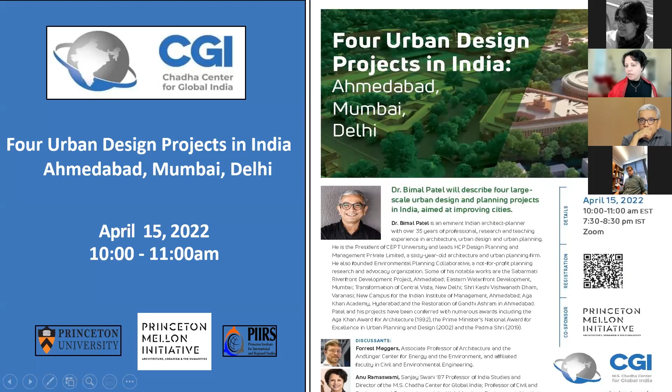Meanwhile, I'll introduce today's seminar and speaker. So I'm Anu Ramaswami. I'm the faculty director of the Chadha Center for Global India. My own background is in interdisciplinary sustainable urban systems. And so I'm particularly delighted to welcome today Dr. Bimal Patel, who's an eminent architect, and he's going to share with us 4 very exciting urban design projects in India. Let me give you a little bit of background about our center, and then I'll talk about today's program, our speaker, and our discussants.

The Chadha Center is a relatively new center at Princeton University. We began in 2019. I joined here as the inaugural director, and we've been really thinking about how can we be interdisciplinary in our study of India and look at the interactions between India and the world that shape human and planetary well-being and our imaginaries of the human experience. And so I'm particularly glad with the interdisciplinary focus to be co-hosting this event with the Princeton Mellon Initiative. And together we'll have an engaging conversation with Dr. Patel about urban design in India with focus on architecture.

So let me quickly speak a little bit about India. I think we all know this, but we anticipate 400 to 500 million more people to be joining urban India by 2050. And the sorts of changes that we're seeing in terms of sustainability, well-being, efficiency, economic development are all going to be tied up to India's urbanization story. And so that's why this topic is so relevant in terms of thinking about global India and how India is going to be in 2050.

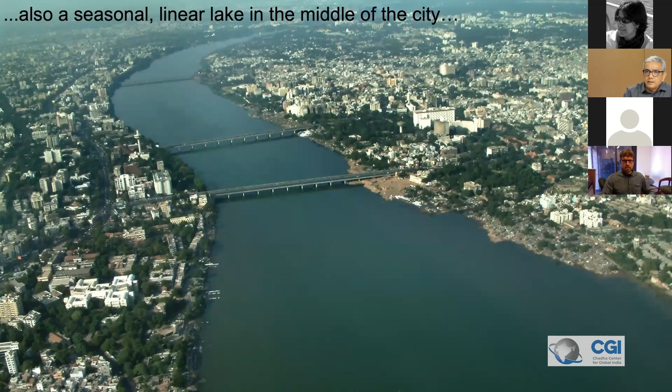Also, a barrage built downstream in 1976, which is a long time ago, had turned the river in the middle of the city into a sort of a linear lake, a seasonal linear lake. And the water would be used up for irrigation, and then it would turn into a dry riverbed. This is not a perennial river. This is a monsoon-fed river. But after monsoon, we had a lake, and then not.

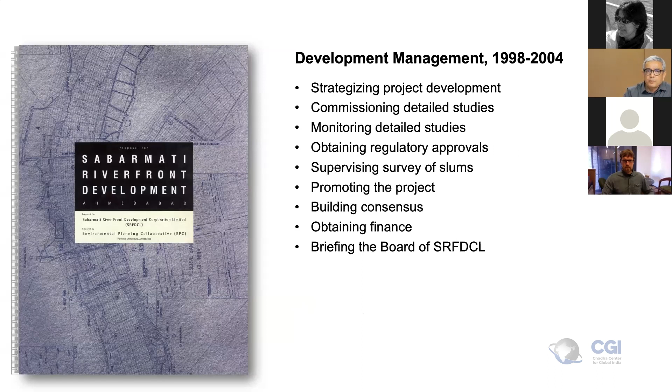We started with a comprehensive master plan in 97. We looked at everything from physical features of the river to hydraulics to financing, etc., and produced a report. After that, I was involved for 6 years managing the project and bringing it up to a point at which it could be implemented. So I was a manager to the project, and my team, we were managing it for a while.

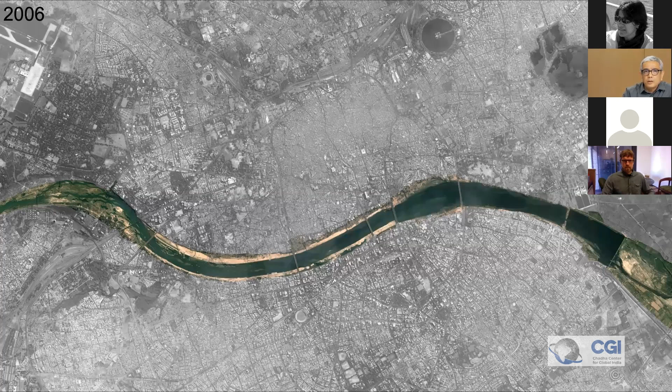So here's the river, as you can see, 11 kilometers of it in the middle of the city. This is in year 2001. The project hadn't started at that time. 2002, we had riots in Ahmedabad. This was also a bad year for Ahmedabad. Project hadn't started. Then in 2004, it commenced. And here you can see in 2006, the reclamation works already there. 2007, 9, 15, and presently.

Projects like this are ongoing projects. It's not totally complete as yet, but a lot of the important works are all finished. So that's what the river looks like now, and that's an aerial view of the river, and the riverfront on either side you can see. The project has 11 objectives. The very first one of them was to make the riverfront accessible to everyone.

Now, as you can see here, earlier, the river was hemmed in by development on both sides, and it was impossible for people to walk along its edges. So the only place they could experience the river from was the bridges. And whichever points there were to get down to the riverbed were all choked up by informal housing. So the basic work here was to train the river, build embankments, and reclaim land, slivers of land on either side as a sort of a public realm.

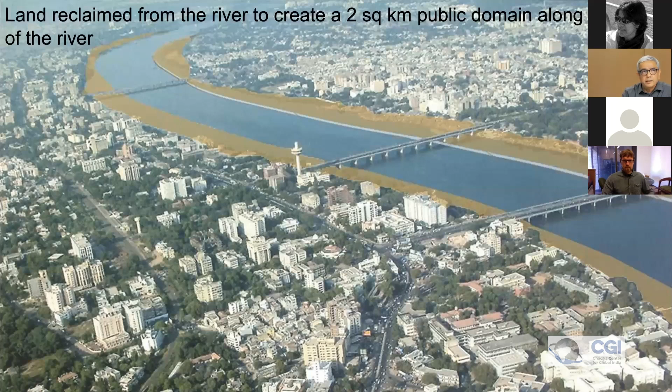So we reclaimed 2 square kilometers of land in the middle of the city and 11 kilometers of the river. So here's just an image of the reclamation works underway. And eventually what the project has ended up doing is it has socialized a private riverfront and made it accessible to everyone. And the land is still being developed even now. So what used to be a riverbed like this with buildings coming right up to the edge now looks like this, and you have a public realm all along, parks, gardens, streets, various things.

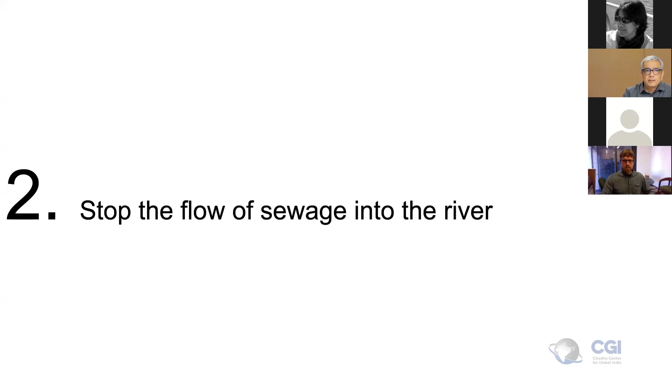The second objective was to stop the flow of sewage into the river. And we had big untreated sewage drains like this flowing directly into the river. This is like rivers across the world and certainly in India where you have sewage coming in. And here what we essentially did was to build interceptor sewers, tap the sewage that was coming into the river, and take it to the 2 sewage treatment plants that you can see downstream here.

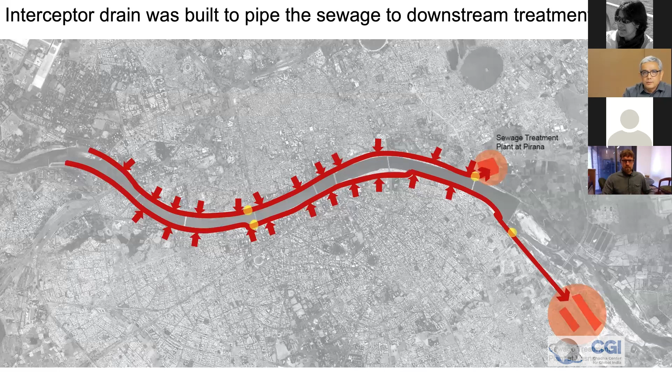So this is the works underway. The interceptor line was built into the reclamation. And now the flow of sewage into the river has been almost completely stopped. Few works are pending, and so the water now is relatively clean. It's not sewage.

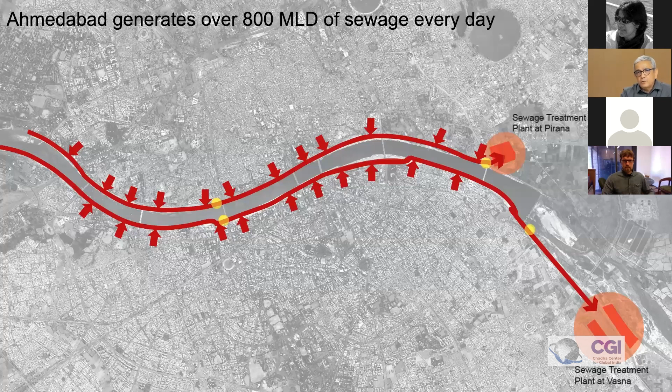The third objective was to replenish the river and recharge groundwater. So the river is a sandy bed, and it loses 7 mld of water every day. This is good news for groundwater recharge, but you need to keep adding water. And so the idea, which is not complete as yet, but underway, is to use treated water from the sewage treatment plants and put it back into the river so that Ahmedabad can have a sort of a perennial lake, a linear lake in the middle of the city. And this work is underway, and presently the water in the lake comes from the Narmada, and it will come from treated sewage very soon because the other water is not available.

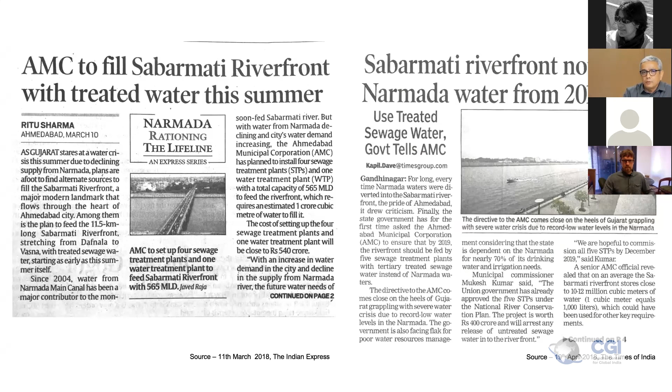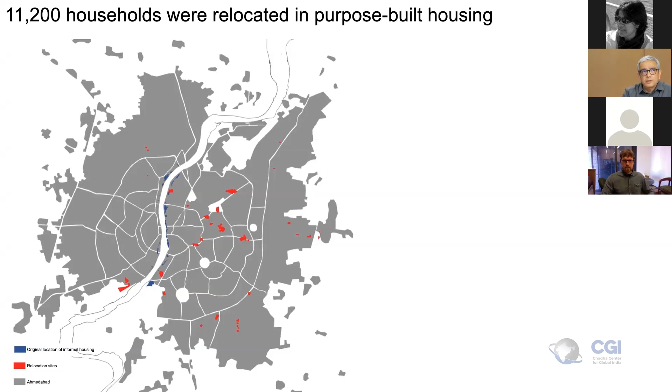Essentially what was done was to relocate the people from the informal housing on the banks of the river to these resettlement sites, colored red here. They are in the middle of the city. It meant a bit of disruption, but eventually 11,200 households were relocated in purpose-built housing.

Now, actually, 1,100 crore rupees, I don't know if that means approximately, I think $150 million were transferred to 11,000 of Ahmedabad's poorest households. So this was a very large component of the project, which is to actually bring subsidized housing to the poorest people in Ahmedabad. The fifth job was to reduce the risk of erosion and flooding.

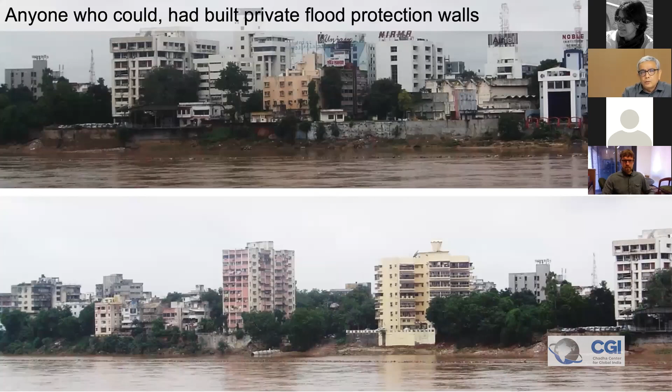Now the river in monsoon gets a lot of water, torrential floods of this sort. The catchment areas are controlled by dams, but even then, when the dams are open, you get a lot of water. So everybody who could had earlier on built their own private walls. Anybody who could afford it had built private walls. Now what the project has done is to give a common wall to everybody.

You can see here in 2015, the flood water here and the lower promenade where the trees are is submerged. And then when the water goes away, this is the situation after the flood. So the whole city has been protected from floods by this embankment, an 11-kilometer embankment.

Sixth job was to create riverfront promenades and parks. So here you can see people enjoying the water. In 2012, at the lower level, we have a pedestrian promenade of this sort. The section of the river is pretty much like that in Paris, for example, but we don't have streets at the lower level. It's entirely pedestrian here.

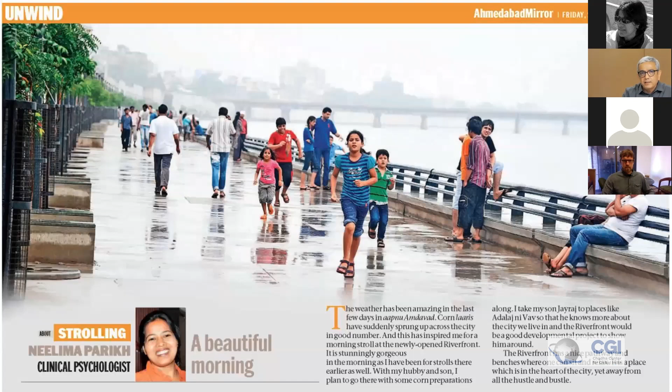And the trees have grown since then, and this is a clipping from the newspapers at that time. It brings lots of people to this place, people of all ages, all classes, etc. meet. So this has given a vast amount of public space to the city.

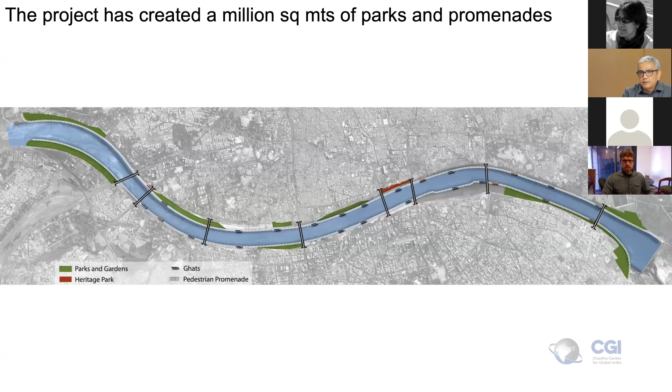Many parks have been built, like this one that you can see. This is a large 1.5 kilometer long park across from Gandhi Ashram. There are other parks like this one for children, or this one which has got a flower garden, etc. So the project has added almost 1 million square meters of parks in the middle of the city, in a city that lacks public space and parks.

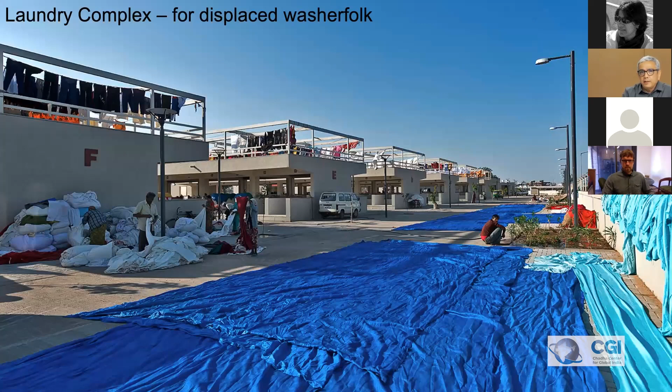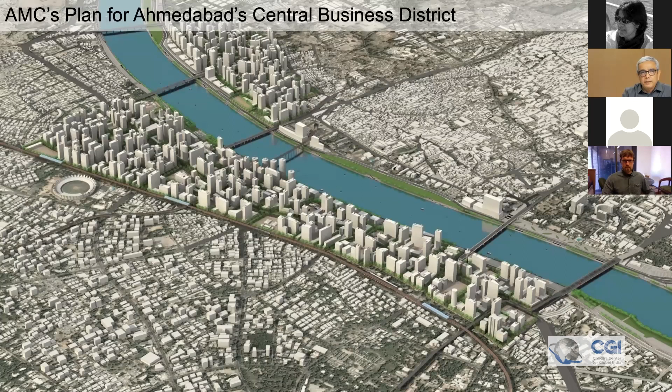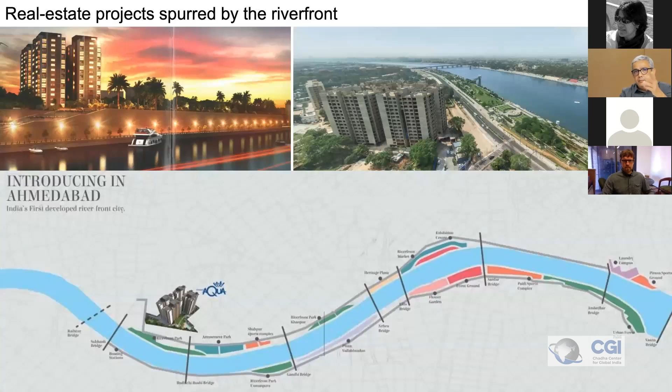And eventually buildings like this will come up, maybe here. The areas on the side will be densified, and indeed many developers have already started building on both sides of the project.

That's the north-south link, as you can see here. Here's another view of the same thing.

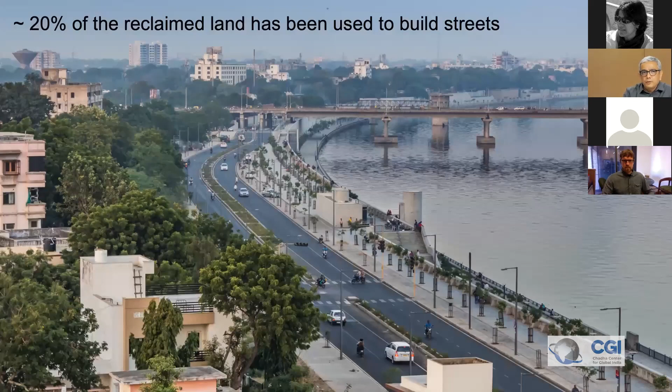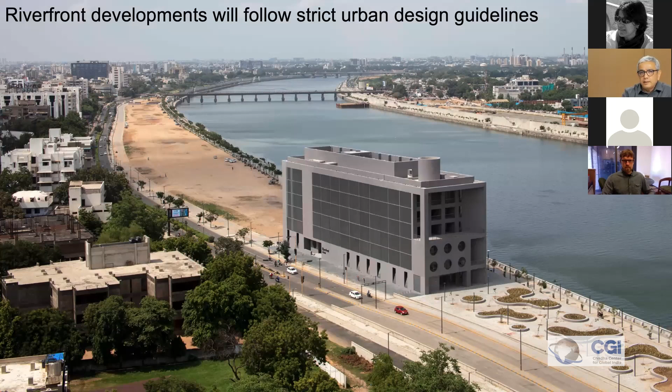The 10th idea was to pay for the project. It's a completely self-financing project. It does not use tax money, it uses borrowings just now. But all this land colored in blue, about 14.5% of the total reclaimed land, is to be sold for development. The first building that has come up is this one here, and 14.5% of the land will be used for buildings like this. You can see that it has no compound wall, which is what most Indian buildings have, so the edge is clear.

The cost of construction for this entire project was about $196 million US. The cost of relocation housing was 144 million. Interest and other costs is 98. And revenues expected from this project, from the sale of land, is 459. The prices of land continue to rise, so the project is financially very, very safe in a sense.

The 11th objective was to bring Ahmedabad together around a large civic project, and here build its capacity to tackle complex urban problems. So here's me when I had black hair in '96, explaining the project to stakeholders. A lot of work initially was about getting everybody involved in the project.

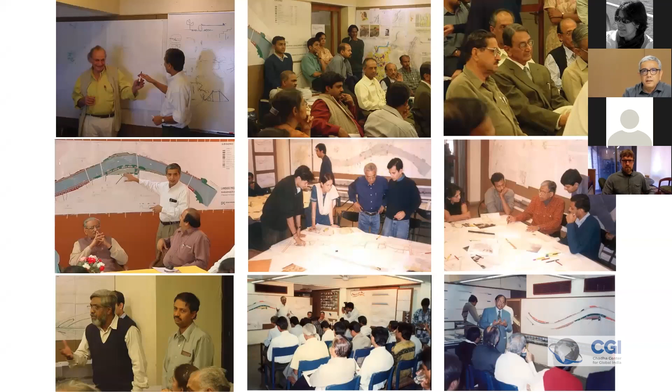In the city, here's a workshop for the professionals of the city. Here's an exhibition, there were many such. I'm just showing you a few pictures. Lots of people thronging by the model for the project. And the newspapers get involved in this.

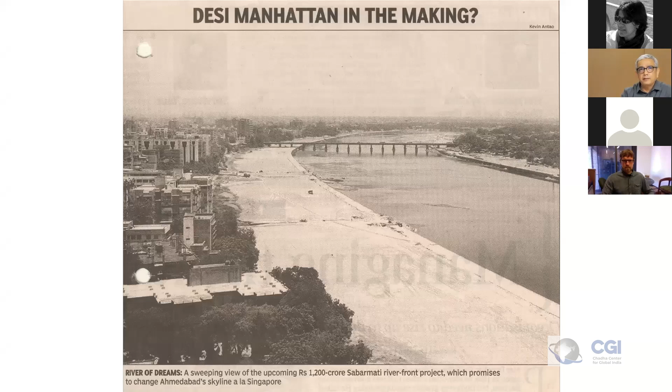There was lively, contentious discussion about the project. Here's something about a Desi Manhattan in the making. And here's, of course, people who were worried about the project, had apprehensions, and were genuinely concerned about many aspects. Here's somebody who claimed the historic market is going to get wiped out. And here's somebody who's worried that this is going to be entirely commercialized. So the newspapers became a place where a lot of these debates were held.

And the High Court got involved. So it was a project that went through all the contentions that you might expect in a democratic society.

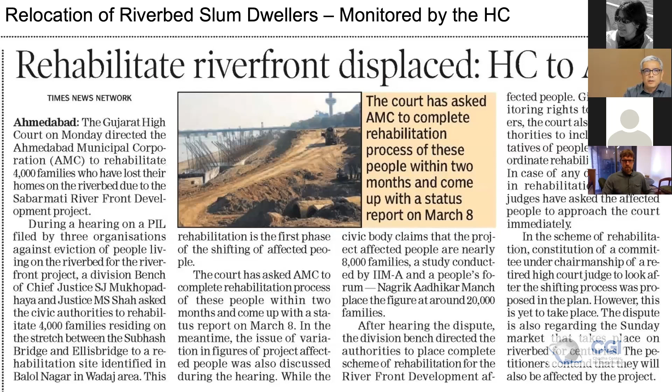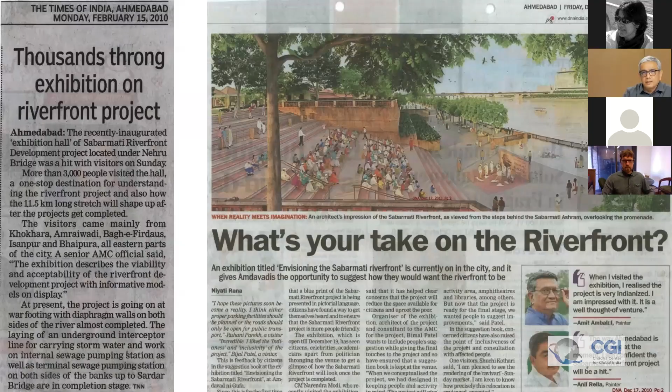So really, this project is about bringing the river back to the city and the city citizens back to the river, and that's what it's about. So I'll stop on this project at this point. Let me go to the next one.

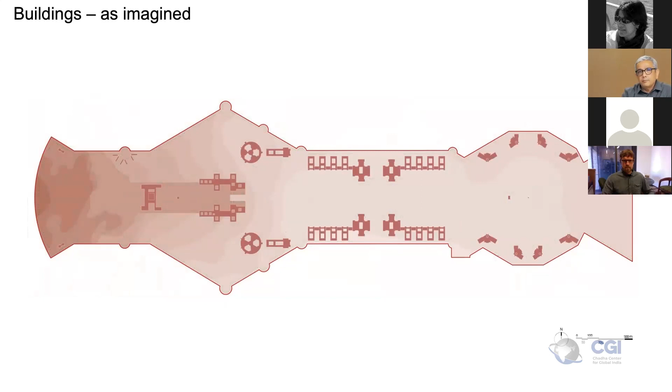There was this gently sloping terrain on which a platform was created, on which a grid of streets, orthogonal and radial streets were put, a lovely landscape, and then you have formal gardens on either side. This was inspired by Paris, the Champs-Élysées, and the Washington Mall, and then there were these avenues of trees here. This was the vision of Lutyens, that there would be buildings on either side of the central processional route. But eventually he was able to build only this much. So by the time the Raj ended, only this much was built.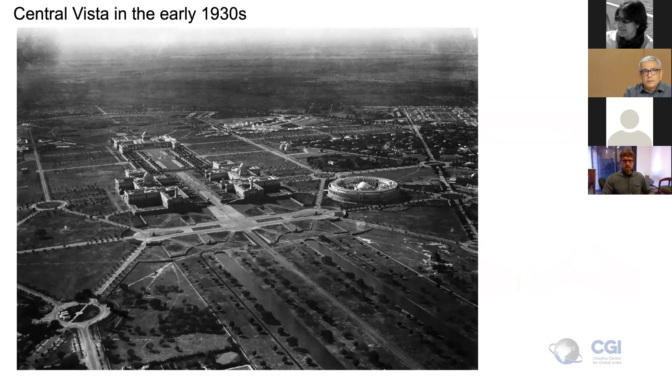Here's an aerial image of what the place looked like. When India became independent, the whole place was appropriated by Indians. This is in 1947. The people took over the place. The government house, or the Viceroy's palace, became the Rashtrapati Bhavan, the President of India's house.

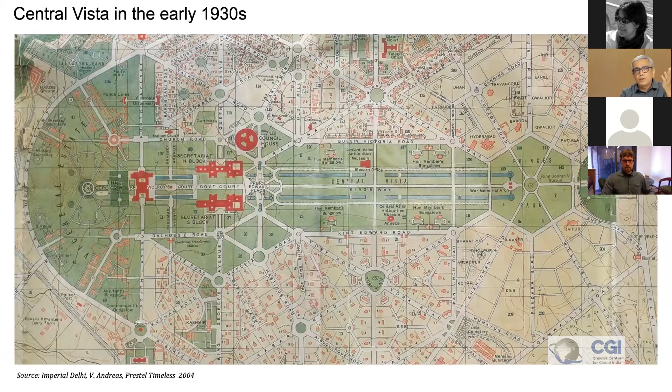The council house became India's parliament, and the government offices became ministry offices. So this is the icon of the government of India. But over the years, this place has been managed without a comprehensive, inspiring vision, and very poorly managed, actually. So what used to be something like this now looks like this. You can see this sort of haphazard set of buildings that have been built on either side of this very, very formal landscape and street network.

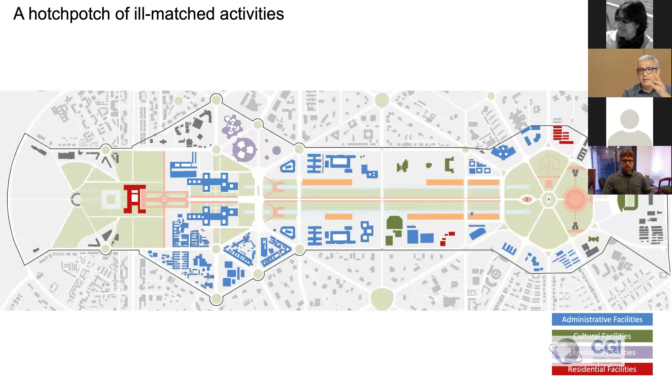Now, it's a magnificent space even now. It's the seat of India's government, a heritage asset, a precious civic space. It's the most visited tourist destination, but it's a hotchpotch of different administrative, cultural, legislative activities, many of which don't need to be here. All of government's ministries cannot be housed here because there's a lack of office space. There are old World War II barracks, these red ones here, you can see, that were never removed, and precious land is occupied by these barracks and jobs that don't need to be here. This is what the barracks look like next to magnificent heritage buildings.

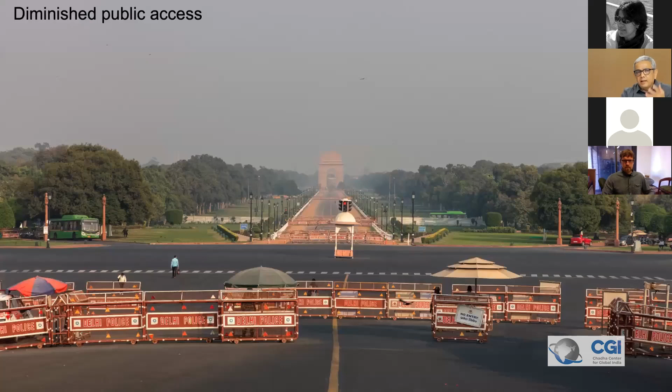The public access is diminished because of VIP movement. It's a very poor use of land. The government buildings have a sea of parking around them, and not a single additional square foot can be built.

Inside, the offices are quite dispiriting. 50,000 people work here, but it's really in poor shape.

There's inadequate office infrastructure. These buildings were not meant to be air conditioned, so they rely on window air conditioners, which guzzle a lot of energy.

The architecture is quite incoherent everywhere. It's just separate sets of buildings plotted out and built upon.

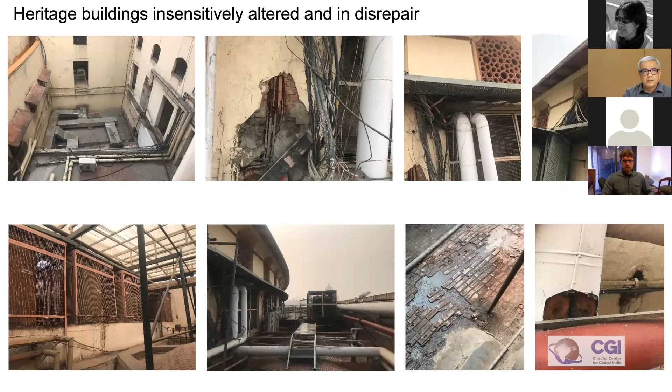All the old buildings are in terrible shape. All of Lutyens' buildings have been added to and altered, and the infrastructure put in there has been destroying the buildings over the last few decades.

The landscape is quite lackluster. For much of the year, these are just large lawns on either side.

The streets are poorly managed, with poorly managed traffic and parking. There's a big national parade every year, but there isn't adequate infrastructure for it.

This is the most visited tourist spot in Delhi, but the facilities are inadequate. There aren't even toilets. There's no place for anything. So this place has been crying out for improvement for years.

The Central Vista project basically aims to comprehensively transform this space to ensure that it serves its many different functions effectively.

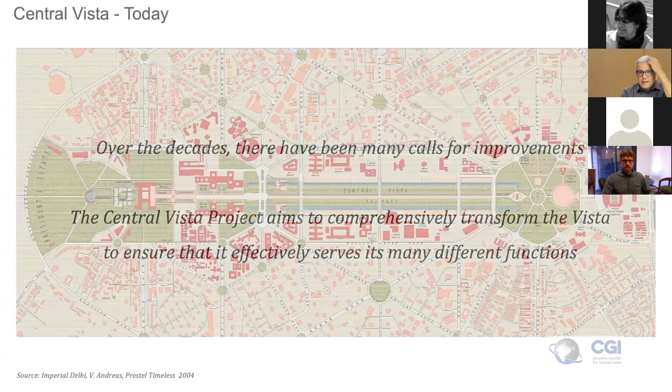It's a large project, and I've done talks on it which are available on YouTube.

This is what Central Vista looks like today, and the master plan will turn it into something like this. Let me go back once - that's what it is, and that's what it will look like. There are a number of facilities to be built on either side, along with parks and gardens.

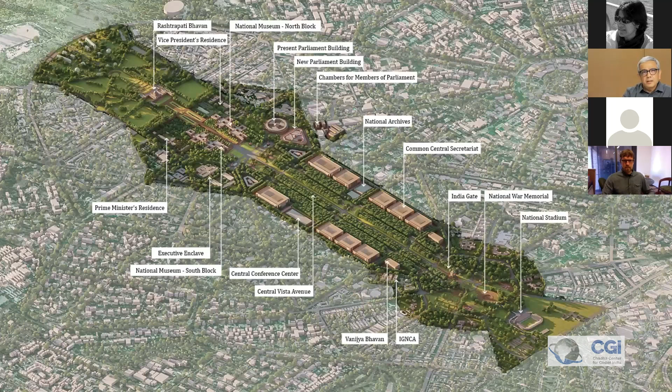The first objective is to modernize and expand Parliament's facilities. Next to that round building, which is the Parliament, we are building a new triangular-shaped building, the new Parliament building. The old round building is quite inadequate for Parliament's needs.

This triangular building is the new one being built right next to it, and the two will work together. The old building will be restored and its offices will be used; it will also have public places for people to visit. So that's what the Parliament complex will look like.

The second objective is improving productivity and efficiency of administration. This is to be done through these donut-shaped office buildings you can see - there are 9 large buildings and 2 small ones on the far right, along with the National Archives and a conference center.

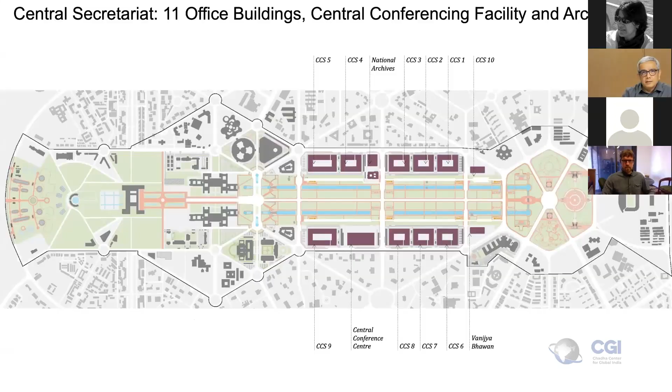Just to give a quick idea, these are the large office buildings on the two sides. The buildings are large, each one housing about 6,000 people working in them.

There's a courtyard in the middle, and it's a very rational, efficient office building connected by an underground people mover linked to the metro - so it's a transit-oriented development, completely and seamlessly connected with public transport.

The first 3 of these buildings are being built right now. Here are some images of what the buildings look like.

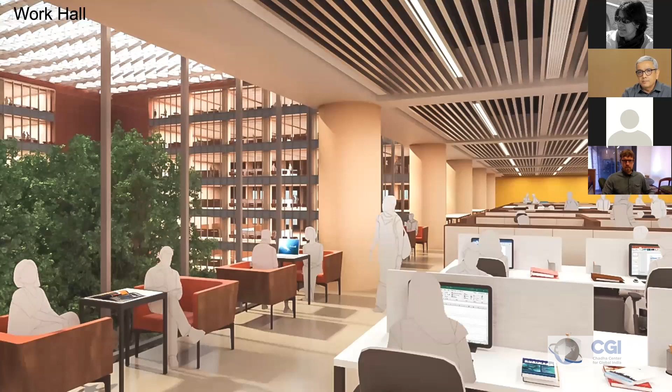That's the entrance, and these are the workspaces inside - straightforward, large work halls overlooking the courtyard in the middle, with lots of natural light, proper air conditioning, and very efficient energy use.

These are the offices inside - large ministers' offices, though not every office is that large.

In the center there's a big courtyard with places for the staff to work and have lunch. So that's the courtyard in the middle of the building.

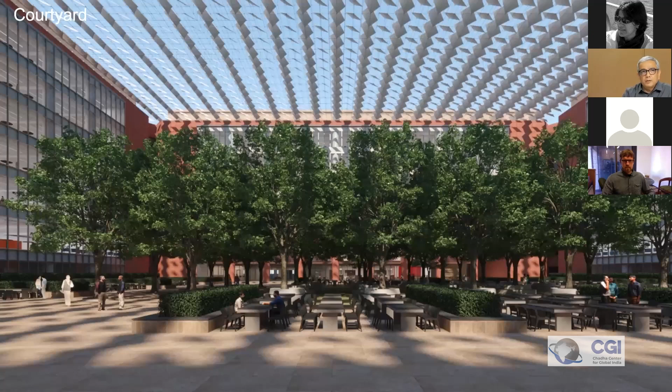So there are basic office buildings on both sides, and the National Archives of India is here as well.

On the left-hand bottom corner, you can see the old historic block with the three courtyards, designed by Lutyens. It's a lovely building. On the right-hand side is a large block we are building - you can see the historic building on the left and the large new archive block with all sorts of modern facilities on the right. This is to replace a present annex, which is in very poor condition today.

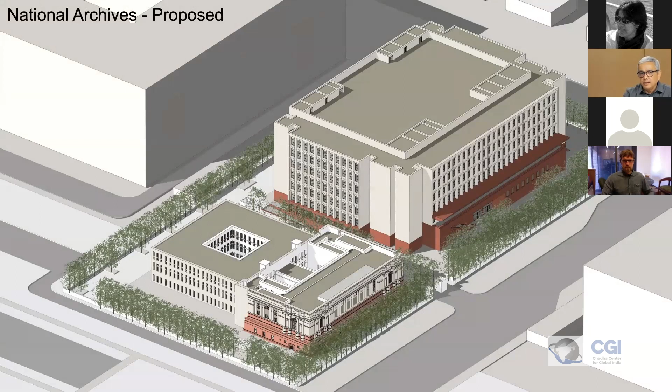I'm not going to talk about the conference center - it's not designed as yet. It's all a sequential thing. We have to build a few buildings, move people there, and then tear down older buildings and build new ones. That's the idea.

Now, the third objective is strengthening cultural and recreational facilities. There are museums, there's IGNCA here, but let me just talk of this central space in the middle, which is a large and vast public space for national events. It's a precious civic space for Delhi's residents.

You can see here people use it in a marvelous way, and tourists throng to it, as I told you earlier. But it's under much stress and in a state of disrepair. So we're basically keeping its structure the same.

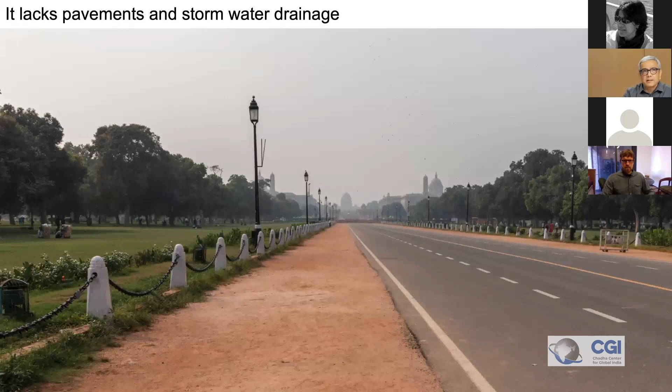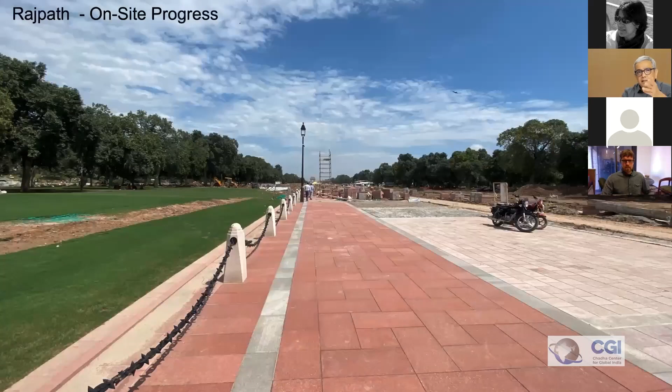That's the pathway under construction. Most of it is finished. We added a lot of infrastructure below the pavement so that national events can happen in a better fashion.

This time's Republic Day parade actually took place here, and everything functioned quite well, as you can see here. The landscape is lackluster, and we want to add proper irrigation systems, because otherwise we were wasting too much water growing these lawns.

So there are these lawns here that have been done, and the place is going to be thrown open to the public in another month or a month and a half.

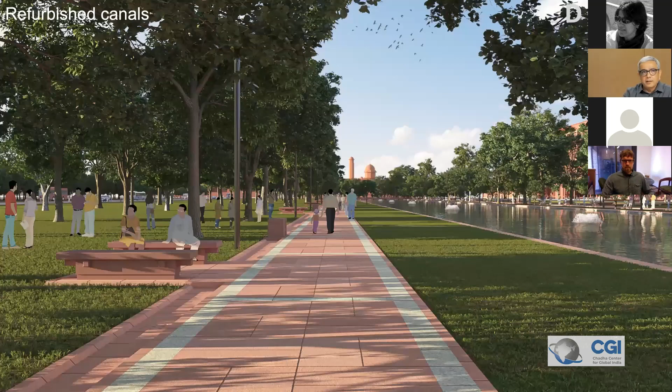Places like this had no pavements and walkways, and there were bald patches in the lawn. We said we would improve the canal on the right-hand side, and you would have these sort of walkways with benches and trees. Here is the same place that has been transformed with this landscape.

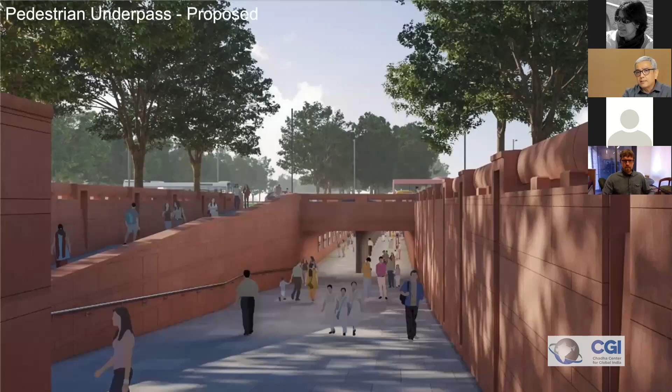There are places for vendors, where the informal sector can come and sell. There's toilets, amenity blocks, etc. Pedestrians have a rough time crossing streets, so we have underground passages that improve pedestrian connectivity - a basic uplift and refurbishment of this place.

Also for the parade, they had no real infrastructure, so we're making this easier for them to hold the parade without destroying the landscape. Instead of the sort of seating that used to be built every year - build and break, which Indians are quite familiar with - we now have bleachers of this sort, and this time's parade used these bleachers.

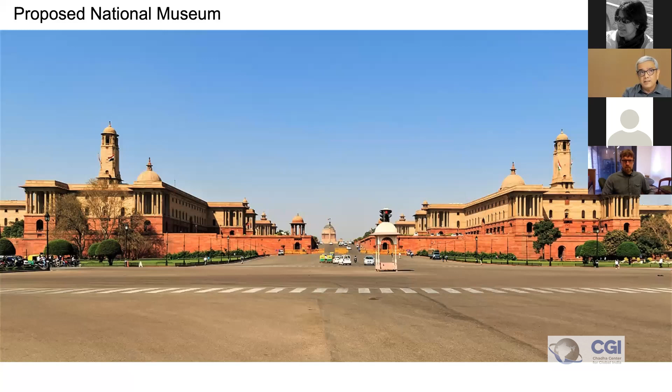The National Museum - this is actually the seat of the government right now, and powerful ministries sit there, and that will be converted to a museum.

Now, the ultimate objective - I'm not going to talk about points 4 and 5, their work is underway - is protecting heritage, expanding public space, and changing the iconography of power here. So you can see here, this involves a few things.

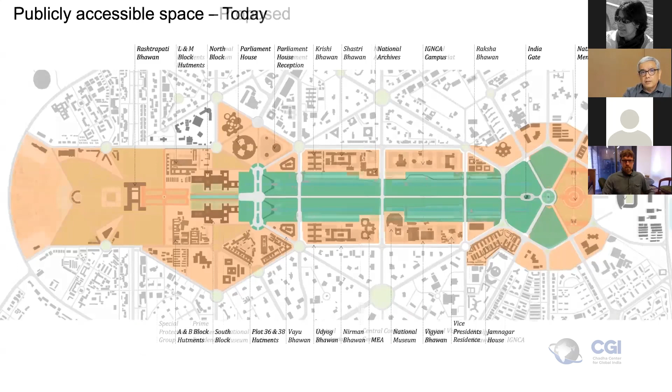The green space here in the middle is what was publicly accessible space earlier. After the project is complete, the green space expands. So we're actually expanding public space when we develop the gardens here.

These bastions of government are going to be turned into great museums, national museums, because the ministry offices inside the building will be moved to the new office buildings that are coming up.

As you can see, the whole project is an upgrading and a transformation of the space without altering its basic structure. So it's heritage protection, it's an improvement of the environment.

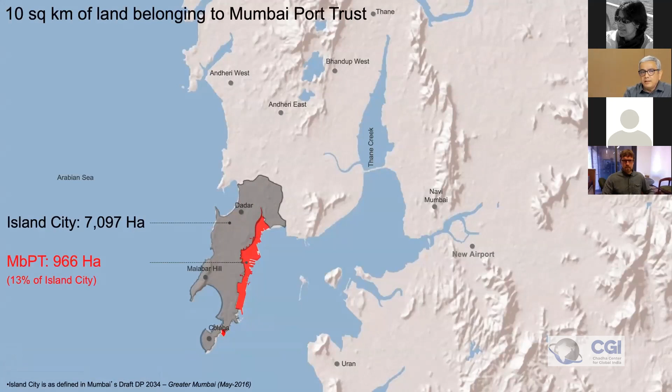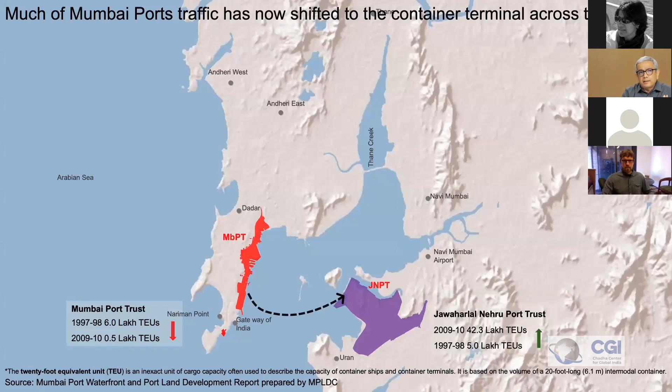Through the 19th and 20th centuries, this was the engine for Mumbai's economic growth. Then, like most port cities, the port got choked by the growth of the city, and so it moved across the bay. There's a big container terminal called the Jawaharlal Nehru Port Trust, and so this entire red piece of land is now underutilized. Some port activities continue here, but most of it is derelict structures, vast open spaces that can be put to better use.

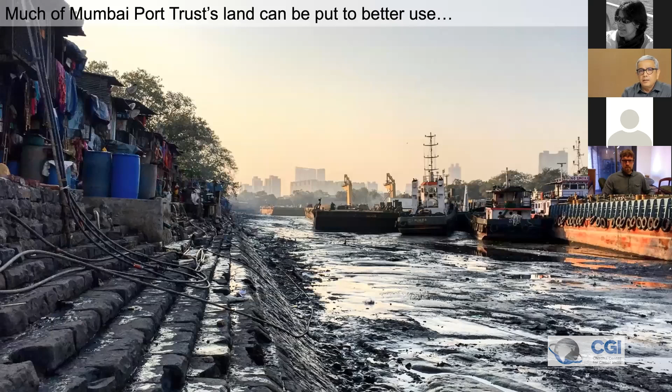There are many buildings getting encroached upon, with lots of informal housing here, and immense pollution from whatever shipping remains. There are vast pieces of land that could be put to better use. And of course, it has a magnificent 11 to 12 kilometers of sea area that Mumbai people simply cannot access because it's part of the port. So this can be converted.

Now, the other important thing about this piece of land is that after all these transport proposals, many of which are underway, like the Trans-Harbour Sea Link, the metro line, or the railway line, when all of these get done, this is going to become one of the most well-connected places in the city. So you have 10 square kilometers of land in the middle of the city, and it's the best connected in a city which is dense and crying out for more space.

So here's a great opportunity to monetize a portion of this land. The land belongs to the central government, and the shipping ministry manages it. Of course, it has to be done in a way that strengthens Mumbai—there's no question about that. So that was the real objective of the project. And we also saw in it an opportunity to demonstrate a new paradigm for urban planning for Indian cities.

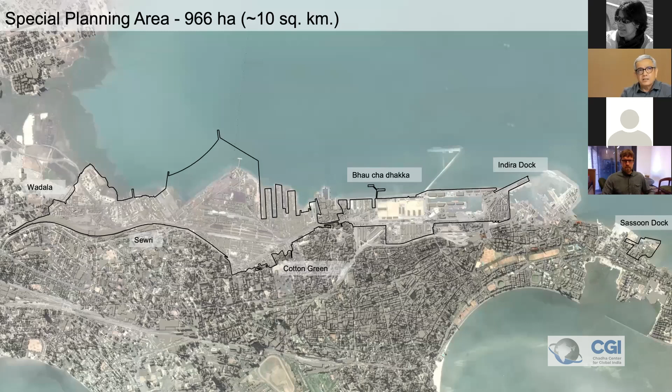So we did a large master plan to start with. You have 10 square kilometers, and this is what our master plan looked like. That's not important, but here you are—here's a model of how we propose the land might be used, and here's another model of the same thing.

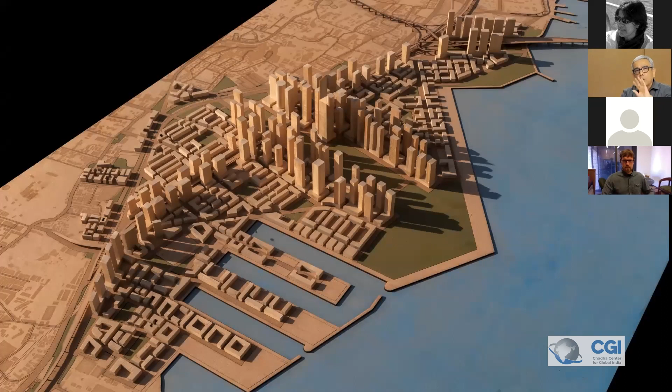That's the redevelopment site number 1, which is about 2.5 square kilometers. Some of it is still going to be used as a port, so not all of the 10 square kilometers will be developed. This is the most intensely developed 2.5 square kilometers.

Now, there are many features of the plan I can talk about—I've given talks about this which are also available on YouTube. But let me talk about just one aspect of this plan: the sensible use of land. I think there are many special features about this plan that demonstrate how we might do urbanization differently in India, but let's just look at one—the sensible use of land.

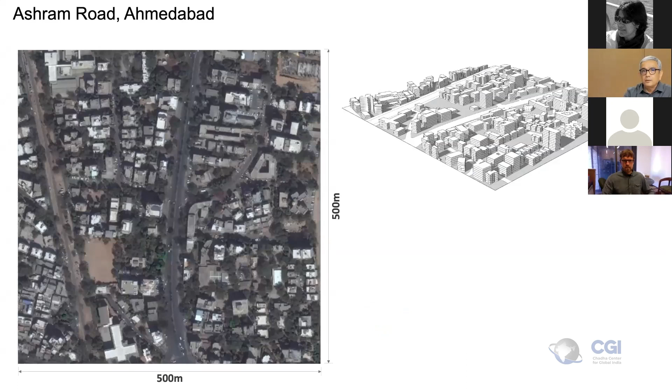If I studied one of them, which is in the center of the city, this is how we use land. The 500 by 500 meters is what you see in the satellite image on the left, and you see how a typical Indian city looks on the right. If you look at the public realm, which is streets and parks, only 17.2%, the gray colored area, is in streets and parks.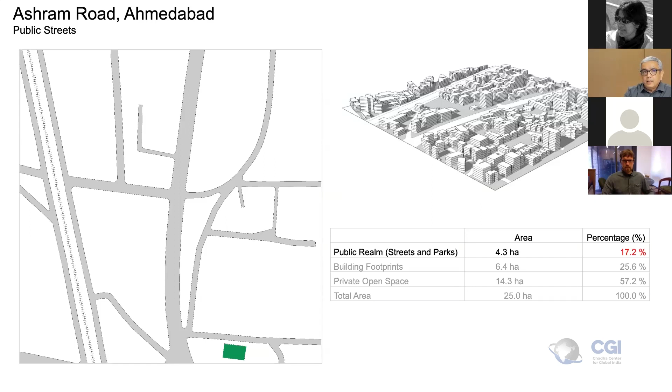So there's very little land in the public domain. If you look at building footprints, which is also very important for a city, only 25.6% of the land is under building footprints. So what's happening to the rest, the 57.2%? That land is privately held land that private owners cannot statutorily use because of building regulations, so most of this land is very poorly utilized.

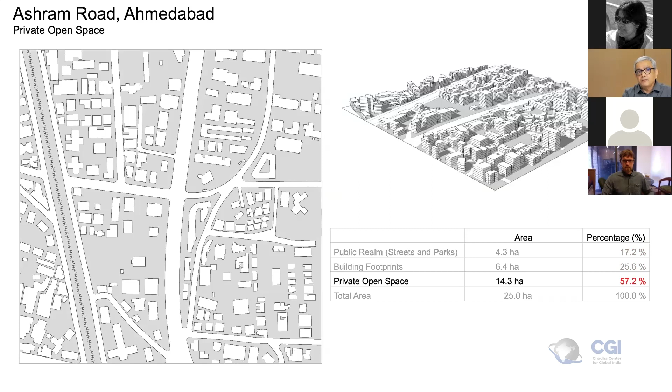Just to show you what these places between buildings look like—it's all these colored slivers of land that you see here, little slivers like this. Anybody who's been to an Indian city understands what I'm saying. There are buildings sitting in private plots with land all around, and all of that land adds up to 57% in this case. It's underutilized like this.

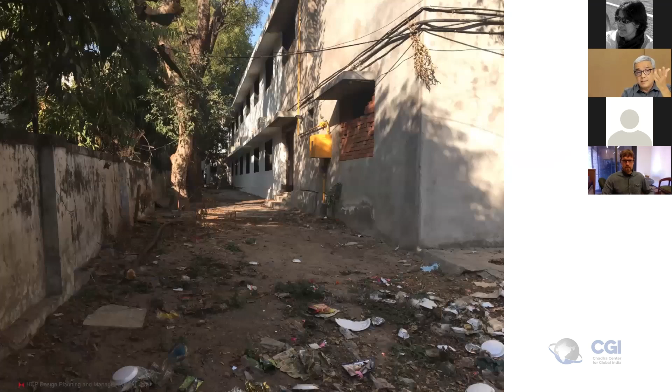You grow a few trees, but really it's very, very poor use of center city land. So these private open spaces are mandated by unthoughtful building regulations—they are mostly small and ill-shaped.

They cannot be well used by private owners. They do not confer much public benefit. And I'd say it's very easy to conclude, or I think most people will conclude, that the allocation of land in Indian cities is very, very wasteful, which is why they seem congested, yet they do not have enough space for people. If you take Mumbai, this is the same story.

This is the most precious land, the Nariman Point in Mumbai. And if you look at the piece of land here, this is where the wealthiest people of Mumbai have their offices. And you have 53.6% land just wasted in space around buildings in private plots.

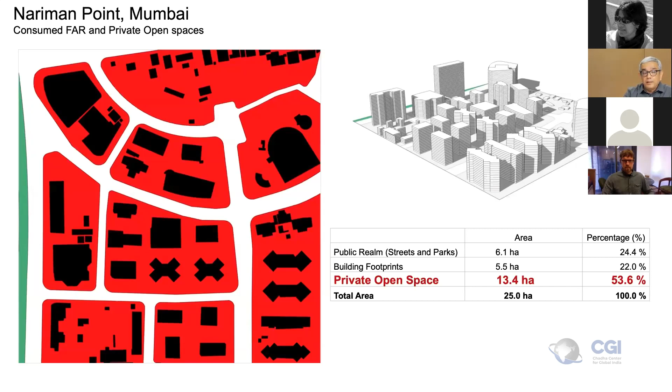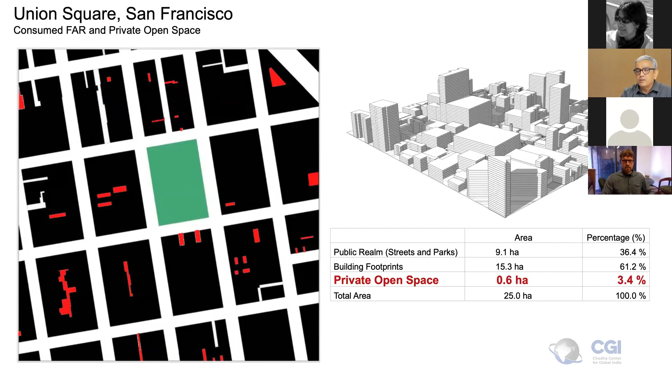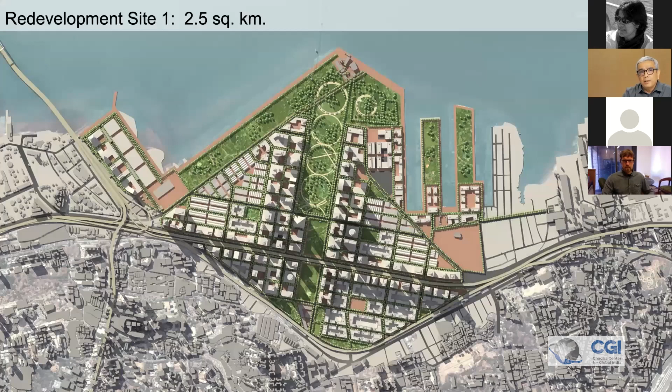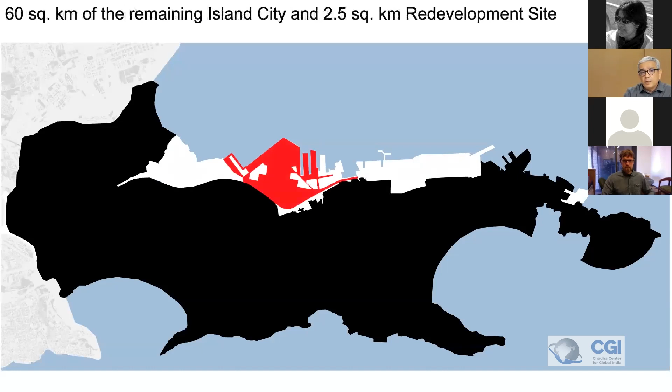Now, the plan for Mumbai Port shows how Indian cities can make much better use of land, and that's what we have done. Now, to explain what this is, let me try and do it very quickly. This is redevelopment site 1. This is 2.5 square kilometers. And if one were to compare it to the remaining island city of Mumbai, then the comparison looks like this. That's the island city of Mumbai. I told you it's 70 square kilometers. That's the port. So the remaining island city is 60 square kilometers. This is where redevelopment site 1 is, 2.5 square kilometers.

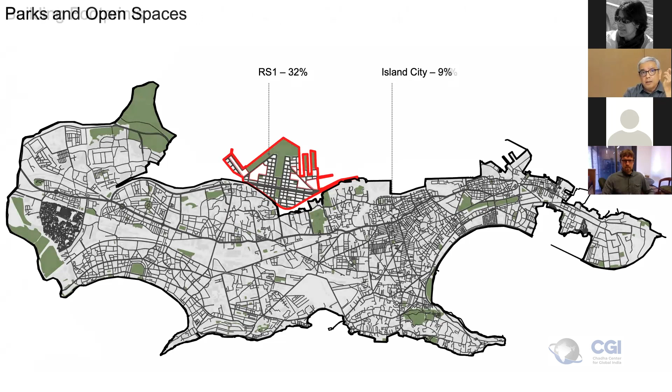And if you look at how the streets are, well, island city of Mumbai devotes only 17% to streets. No wonder its traffic is abysmal and is congested. While the development we propose uses almost 38% for streets. So it has a dense network of walkable streets. If you take green spaces, island city of Mumbai has 9% publicly accessible green spaces, and our site has 32%. If you look at the building footprints, we were very conservative. We could have increased this. We have kept it at 22%, and the island city has 27%.

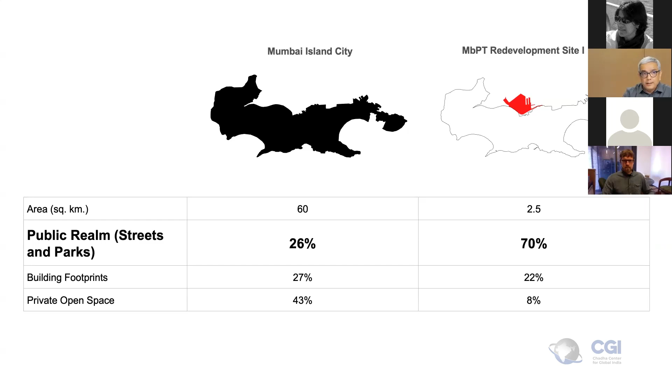Consequence, the distribution of land use compares somewhat like this. If you look at the public domain, which is streets and parks, we have put almost 70% of this land in the public domain, while adding as much floor space as you would have built in the city in the traditional way. So this also addressed a political problem that we anticipated, but we can talk about it later. So it makes sensible use of land.

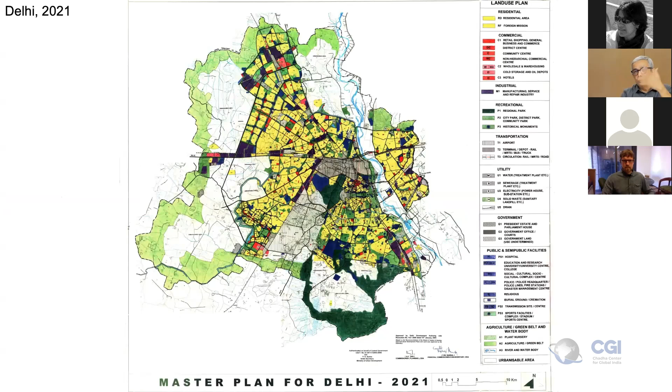Now, my last project here is the development plan of Ahmedabad. Just to give you a sense, this was done 2002 to 2012. This work we did in 99, I think. My claim is like this. Almost all Indian cities have statutory urban plans in place. They look colorful plans like this. This is Delhi. The previous one was in Mumbai. Then you'll find every city authority will have a master plan like this for Chandigarh. And then it will be accompanied by a whole set of building regulations. And we have a lot of planning.

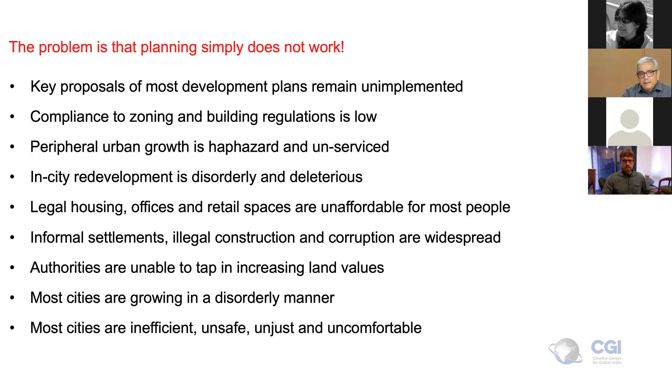There are thick books like this, which have lots of rules and regulations people are supposed to follow. The problem is that this planning simply does not work. Most proposals remain unimplemented. Zoning and building regulation compliance is low. If you look at most cities, peripheral growth is haphazard, unserviced. In-city redevelopment is disorderly. Legal housing is unaffordable. Informal settlements are widespread. Authorities are unable to tap into increasing land values. Most cities are growing in a disorderly manner. And all of this adds up to making for inefficient, unsafe, unjust, uncomfortable cities.

Now, the planners blame everyone and everything for this. They blame political interference. They blame a lack of enforcement. They say government is unable to enforce. They lack funds. They say they lack resources and staff. They blame the developers for the amount of power they hold and their greed. They say Indians are corrupt. They do not like to follow rules. This is a very common statement. Some even say capitalism is the problem. So we don't think that.

We think that Indian planning needs a paradigm shift. We need to do planning differently for it to work. And I do a talk where I talk of these 8 reforms that are needed. We need to accept that the future cannot be predicted. We need to focus on tasks that simply cannot wait until later. We cannot do everything at the same time. We need to limit the role of government in providing goods and services and focus on the most essential things.

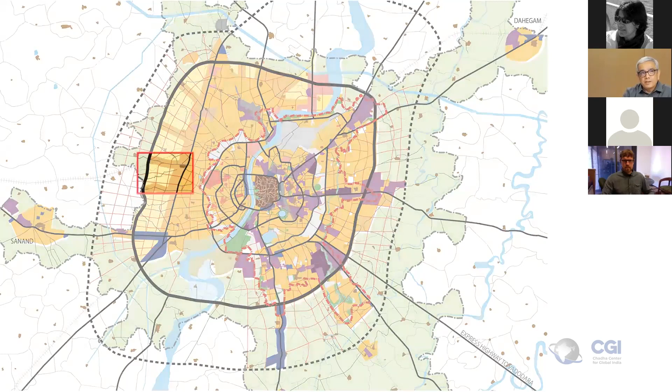You can see here, by 2013, the authority has been able to appropriate land for the streets, raise resources, and ensure that everybody is building in an orderly manner. Now, this was an outcome of more effective planning. That was just a diagram of the development plan. And if you take that square here, first the main streets were done, and then what we call town planning schemes were done.